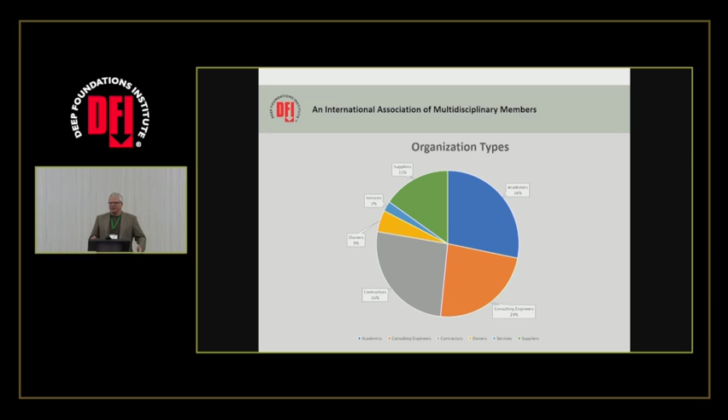I won't delve into this too much, but DFI is a very diverse group. It has all these people who are involved in the Deep Foundations profession. Here's a pie chart of the demographics - you can see a decent balance of contractors and engineers. There's a huge part, that blue part that says academics, but that really includes the students as well, and the academics are only about 4%. The students are really high because every student who's ever applied for a scholarship becomes a student member for free. Suppliers are an important part of it too - they help tell us about the material aspects of the different technologies.

DFI has 28 technical committees. There's one on seismic and lateral loads that Ben's probably pretty active in, and there was something else mentioned yesterday. We fund some research that was mentioned yesterday in Ben's talk as well. The 28 technical committees cover all the technologies, all the foundation type technologies that you see back there with the affiliates. There's lots of good publications from DFI. Every year there's an annual conference. Most of the committees have a manual about that technology that's kind of like best practices. There's a high quality magazine published 6 times a year. All this comes with your membership. You have to go to the conference to get the proceedings - they're available free later. The last thing is a DFI journal, peer-reviewed papers, published about twice a year.

And it's a whole lot easier and faster to get into that than the ASCE Geotech Journal. But there's more - when you become a member, you get access to OneMine, which has over 140,000 documents. Many of them are about mining, but it includes all the old DFI documents and some Department of Interior and Safety Organization documents as well.

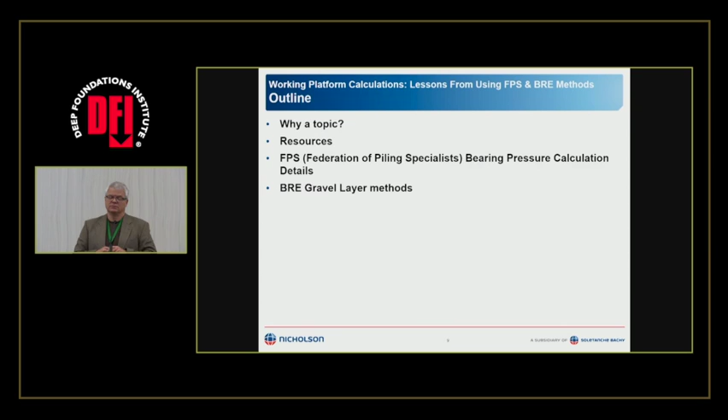Our first thing is a YouTube video produced by Keller, Soletanche, and Menard. This was produced back when they were fierce competitors in Europe. Now Menard and Soletanche are related, but it shows you how important they think this topic is, to cooperate and produce this video.

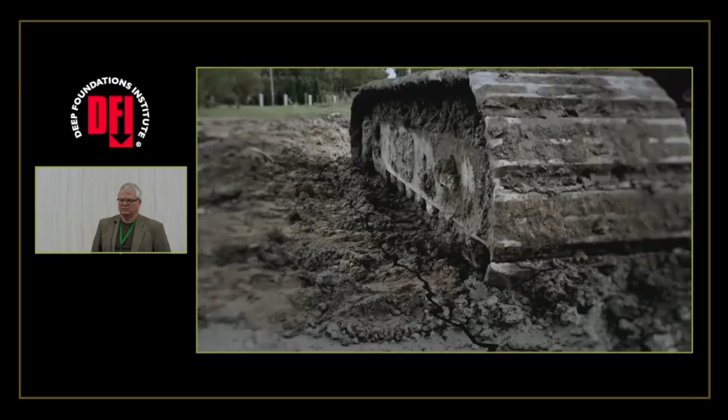Hope you caught that operator's face.

That was the big hit before, now it's like a flashback to a normal day on the site.

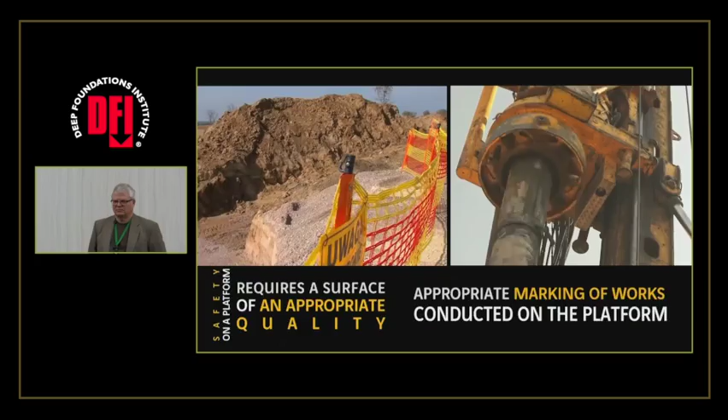So this is about where we want to head: high quality platforms, marked so that people don't drive off the edge.

Explosives are certainly a more European thing. Mark the perimeter so they know where they can drive.

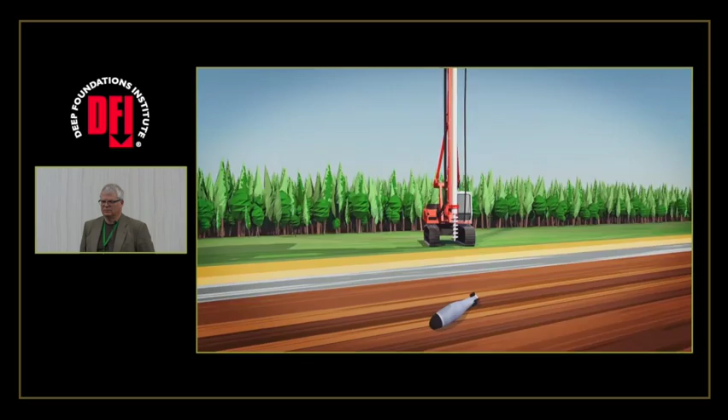Certainly walking on inclined surfaces is a big problem. We'll see some of the charts from the manufacturers that tell us what.

So the images at the beginning were all a reenactment, and it says that they didn't happen, but I think if they dug deep enough, there's probably some parts of that story that really are true. And just because that one was a reenactment...

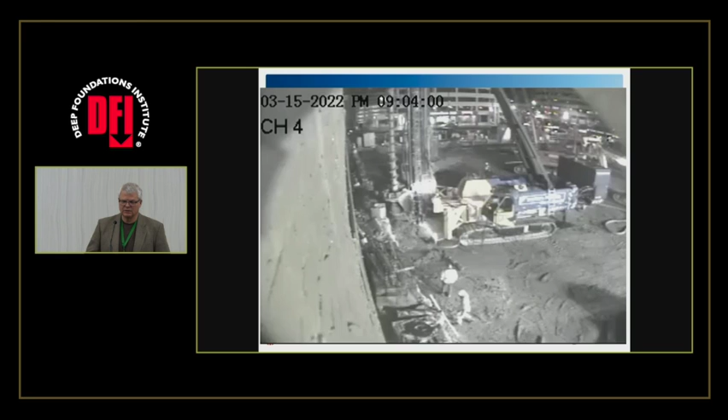Here's one that's real and recent. It's at night. It's always harder to control safety at night and see where what things are going on.

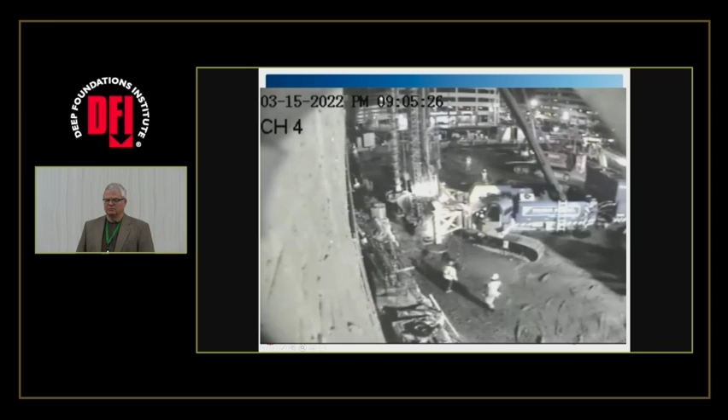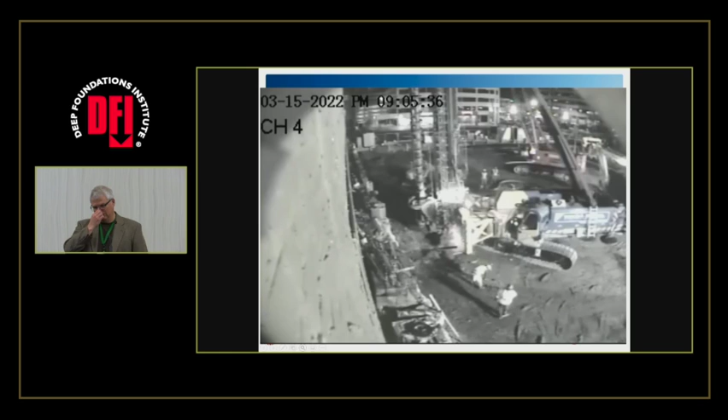Oh my, here we go. That's a bad day for everybody on the job.

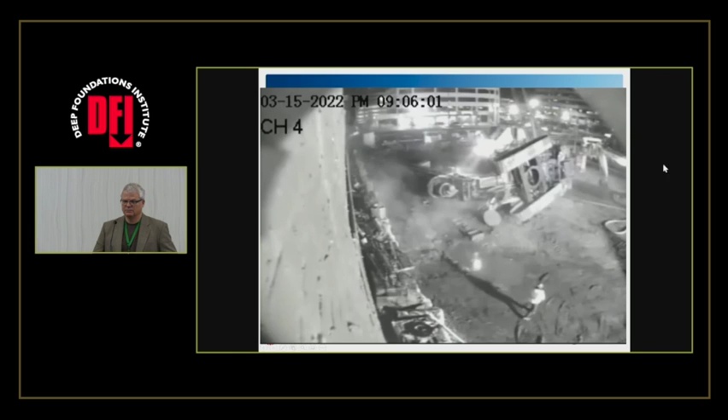Oh shoot, here's another one. Now this video is a little quirky because it's a video of a computer screen. That last rig was walking, this one's walking.

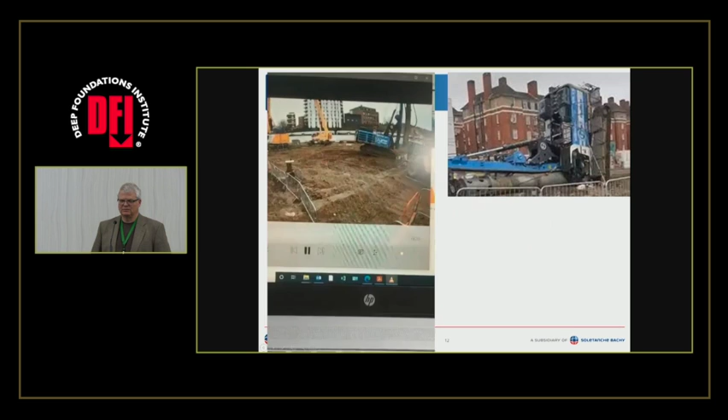When most of us saw the pictures on the right and other videos available on YouTube, we said we don't think this is a work platform thing. But when you see the image on the left, you can tell he was really sinking in.

So I hope those videos affect your stomach like they do mine.

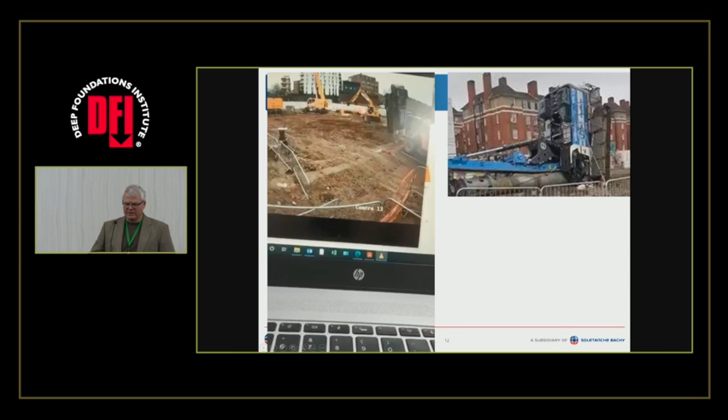So here's a bunch of still pictures, and this will be a little slower pace, so maybe you can see what activity is going on: drilling, extracting, walking, and also see where the rig operator is.

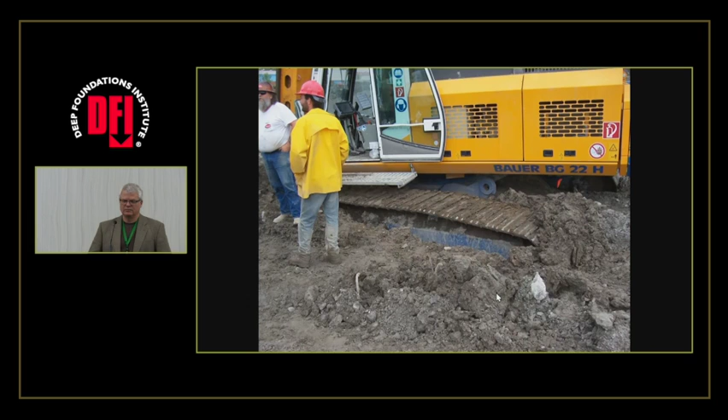That's the same one as the last one. On most of these rigs, the operator... so this actually went to the operator's side. The operator's on the left-hand side when you look from the back.

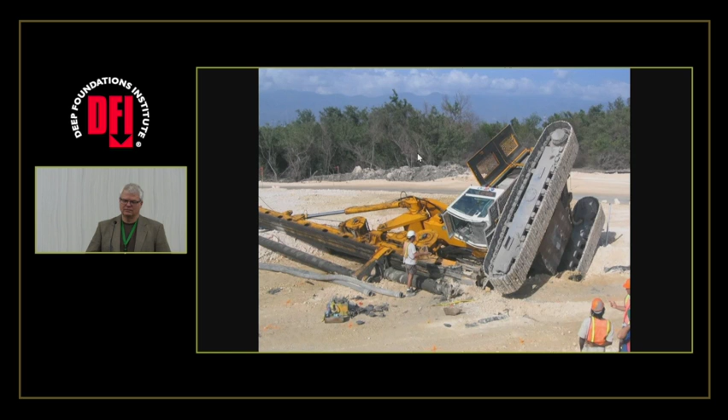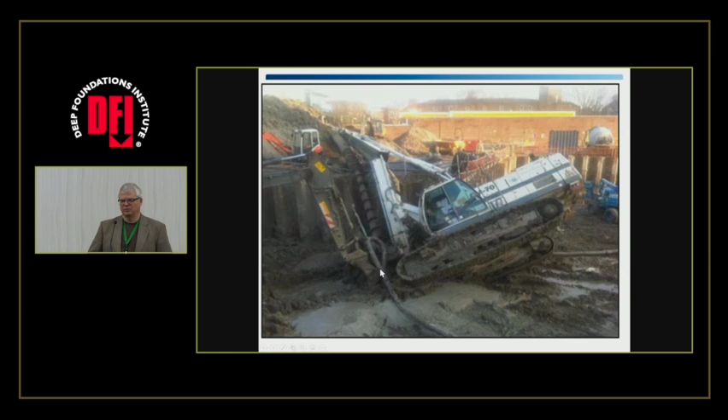Those two pictures were the same. This one, there's a chance that he was pulling tools, can't really tell for sure. Some tools are out and got bent on the temporary shoring.

Here's a whole collection. Another one on the front right track, going forward, front right track. In this case it's hard to tell what happened, and this was a crane system as well.

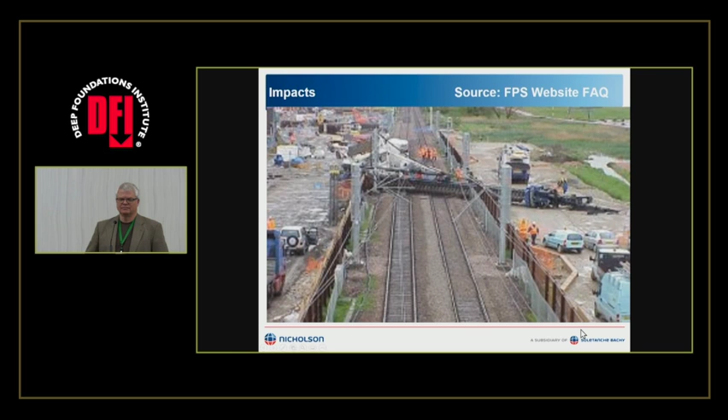You can see that there's impacts, blocking traffic. This is going to make a bad day for a lot of people on this project. In Toronto, a guy died. In this case, his operator cab was right there.

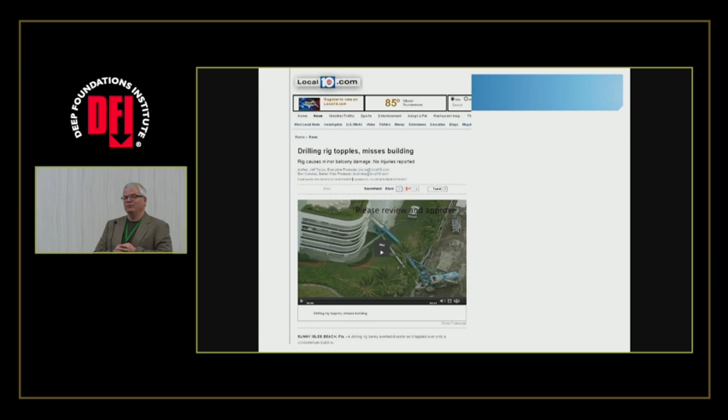This one actually happened when rain fell overnight and saturated the surface.

So I might have led you to some observations there. Think about your observations, and then here's what mine are: it's often over the corner of the tracks, and we'll see why that is when we look at the calculations.

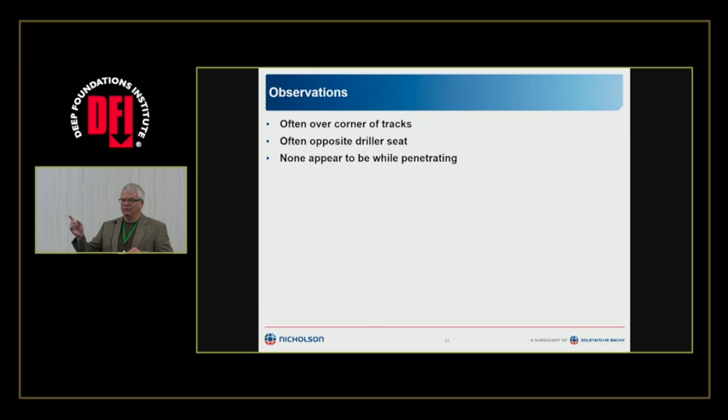It's often opposite where the driller's sitting. I noticed more this time that we're towards the driller, but very often it's opposite the driller. And not a single one of them appeared to be while drilling the hole. You'll see that becomes an important observation when we do the calculations.

So here's what we should have: geogrid, also a separation geotextile would be good, and some gravel to make a work platform. That is the calculations I'm going to talk about today. There are also guidance documents from Europe about how to do that with a cemented, prepared surface.

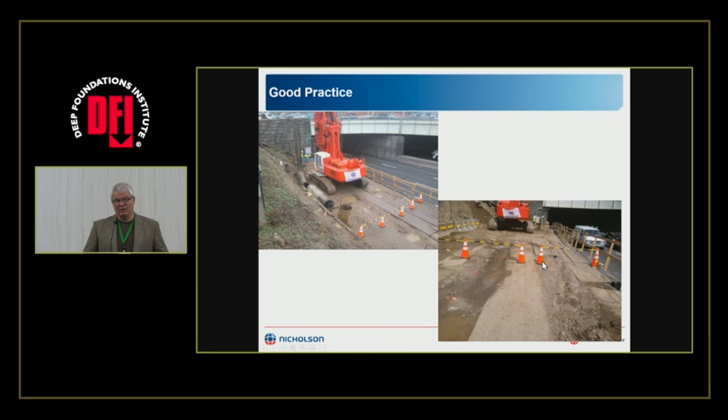It's hard to think about combining them because of strain compatibility. And you can use crane mats. Crane mats work wonders. This is not the most efficient way to use a crane mat, to walk along it, but it's often what's done.

So here's the resources available. This is from the DFI working group website, a working group of ADSC, DFI, and PDCA. ADSC is the Association of Drilled Shaft Contractors, but now likes to go by the International Association of Foundation Drilling. PDCA is Pile Driving Contractors Association. ASCE's been involved a little bit too.

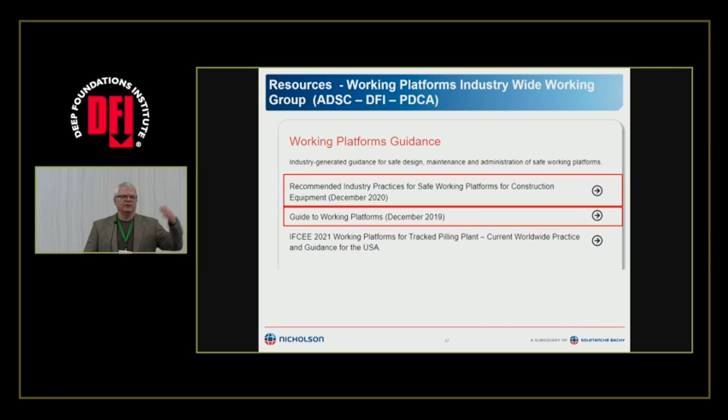Under the guidance documents, there's two that I will show covers of and talk about. This one is the US document that says here's what we should be doing, and gives some guidance on when you should actually do some calculations. And then this one is an ongoing effort with EFFC, the European Federation of Foundation Contractors, to continue this process and make things better.

So here's the cover sheet for the EFFC one. You can see it covers a lot of stuff. Working platform design is just one of them. It defines responsibilities, at least how the Europeans see it, and it has a lot of great references in it.

Another good document you can get at from the DFI website is this video. It's a webinar by the guy who was involved with developing the Federation of Piling Specialists spreadsheet, the one I'm going to talk about. It covers a lot of the nitty-gritty and nerdy stuff, and he does a really good job, so I'm not going to repeat some of what he does.

The Federation of Piling Specialists is a UK organization, and they got tired of this stuff, and they basically said we're going to demand this. All of our members are going to demand that we do calculations and prepare subgrades and certify them, and that's how their practice is. So they developed this spreadsheet to calculate the pressure under the tracks.

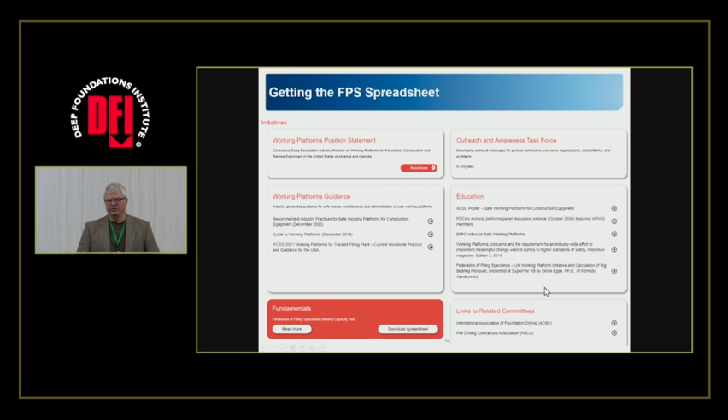So we're going to move into some nerdy stuff with this calculation. The first topic we need to talk about is equivalent rectangle bearing stress, and then we'll look at pulling some data from manuals and stuff you can get from the suppliers.

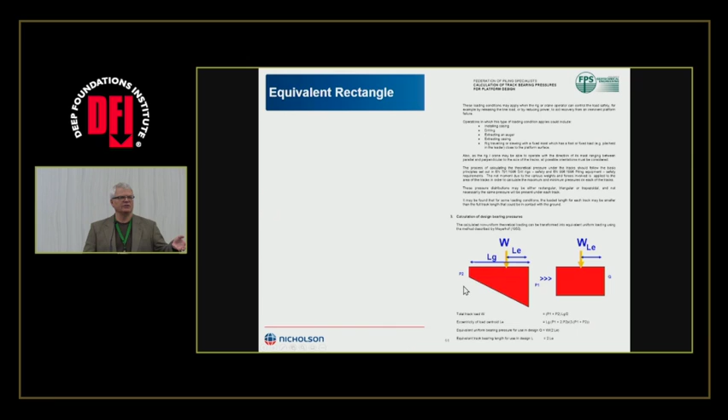I think it's pretty standard even in soil mechanics textbooks. And honestly, there's forces here—you got to look at different weights with different eccentricities. That's the same type of thing you got to look at with a crane or a drill rig.

So what happens is you have this length, you have an eccentricity to the total forces, and you have a length beyond it, and then you say this length on this side is the same as that length over there to get an equivalent rectangle. When you have a triangular distribution of any shape, across the whole length of the track or even a partial length of the track, this pressure is 75% of that pressure.

Okay, let's see what we can get. I just put this slide in yesterday after I was going to have multiple PDFs and things going, and after Mike's struggles, I thought I better put this all in the presentation.

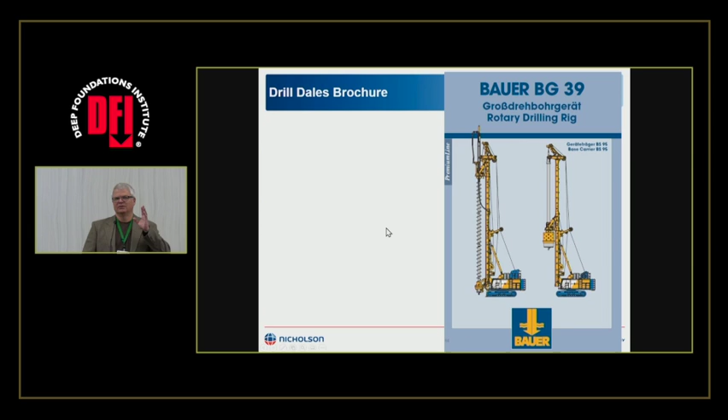I misspelled sales—this is a sales brochure for the Bauer BG39. I'm going to talk about a Bauer BG39. The other manufacturers give you similar information; we just own more Bauers than the others, so that's what I worked with.

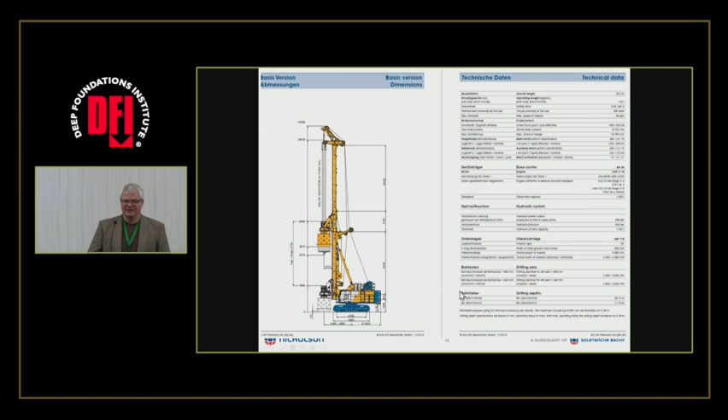So from the catalog, you can get a nice diagram of the rig. This is the basic version, and way up here we'll blow those up, and you can see it's a pretty darn tall rig. There's 10 meters there, 3 meters, 9 meters—it's getting up there in the air.

So we blow up the data, and we can see that it weighs 133 tons. Those are metric tons. Most of the rigs we're using are European made, so we got to work with SI units.

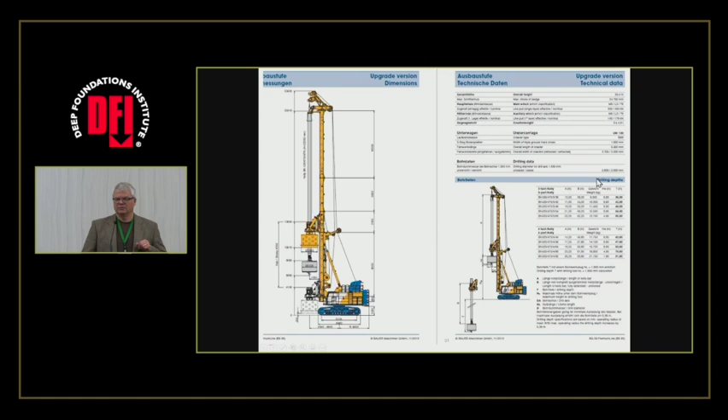It turns out that the rig I'm going to work with is called an upgraded version, which really means it has more counterweights and a wider track, a different track setup—they're wider and longer. So if you take that 133 tons from the base machine and add 6 counterweights at 4.9 metric tons, and divide it by 2 tracks at 1 meter each with a contact length of 5.31 meters, you get an answer that's 3 KSF. That doesn't sound so bad, 3 KSF.

That's maybe what we would have recommended for the footings on this job, and that was really governed by settlement. So how can this be a problem? How can these rigs be falling over from a working platform?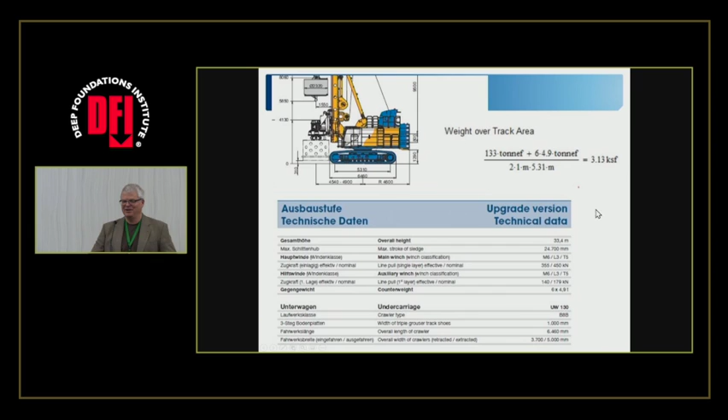By the way, this calculation here with the metric input and the US output was done in a program called MathCAD, which I find to be the most powerful programming language in the world. I am not a consultant to them.

So the reason there's other things going on is there are other forces. There are forces on the main line. On these rigs, the winch back here comes up over here, and that's the main line, connects usually to the Kelly bar of the rig. In this case, it connects - I'm not sure what it's connected to when you're doing CFA piles.

There's an auxiliary line, and I couldn't find a good image of that. That winch comes from here, goes up, over, and to the side. So you can use this to pick up a tool and get it underneath the rig, or do other ancillary picks. Then there's crowd.

And crowd on these rigs - and I'm pretty sure the Liebherrs are similar - is from this winch here, and it pushes and pulls on this drill rotary bracket that from Bauer is called a KDK. And of course we can have different tools out there, so there's going to be different forces involved with different amounts of tools we put on there.

The previous calc you did didn't have any tools in it. No, it did. It actually did have the weight of the tools in the base weight of the base machine, for at least the Kelly system.

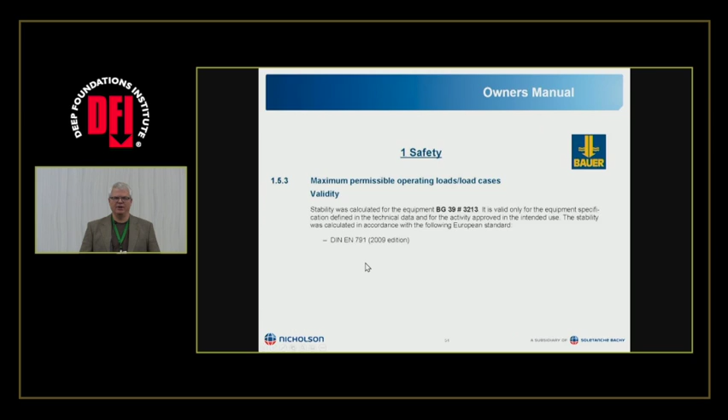An important thing to note in your owner's manual, when you start digging deeper, is that when Bauer calculates things, they calculate according to a European norm called 791. That's now replaced with a newer one. But in either case, they do the calculations like a triangle or a trapezoid. This is the new version - it shows exactly the same formulas.

So when you get a number from the catalog, at least from Bauer - I haven't dug into Liebherr's yet, but I'm pretty sure they'll do the same because this is what their norm tells them how to provide the information - you get the triangular diagram. But for doing geotechnical calcs, we want the rectangular one. Plus, we might use different tools and different counterweight setups on the rig in the future.

To really get the meat of the data, you got to go beyond the brochure to the owner's manual for that rig. In the owner's manual, it gave me that clause above, and then these diagrams here - this is for the main rope case. So load on that main rope that supports the Kelly. It says I can put 355 kilonewtons on there, and I'm going to get a pressure working in the vertical situation of 430 kPa.

That's 9 KSF. Whoa, that's a whole lot different than the 3 we had. And if I want to change the angle of the mast, like boom it down to make a bigger pick on that main line, I can get even 550 kilopascals, and that's 11.5 KSF. This deals with the rig being sideways over here - you get the same number.

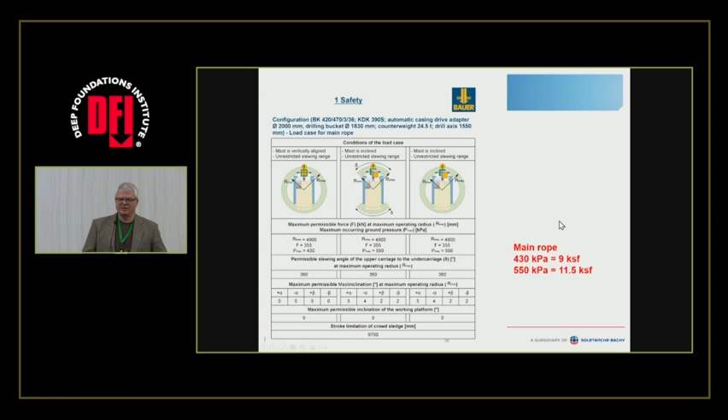And they have another case for the auxiliary rope and another case for the crowd rope. So now we're getting much bigger pressures, but they are the peak pressure, like at the toe of a retaining wall. And that's not what we want to use to design.

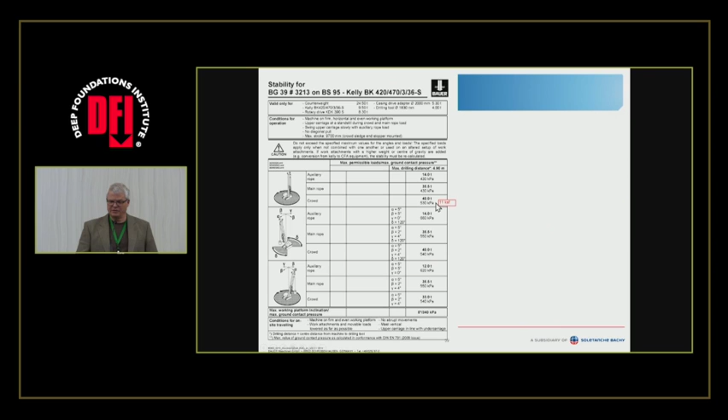If you're good friends with Bauer, you can get them to do a calculation for the particular case you're after. This ends up being a replication of what's in the final manual that we got, and it shows that same 11 KSF. It also showed that it was done using that EN 791, so we know for sure it's a triangular or trapezoid distribution.

If you're really good friends with Bauer - and this is from Malcolm's slide - then you can get them to do these diagrams. These are called butterfly diagrams, and for many years Liebherr actually has this diagram in the cab for the operator. But it's still calculating a peak corner pressure.

This shows that as I rotate the rig around, I get here to about 30 degrees off the tracks, and that's my max pressure. Boy, we saw a lot of rigs with that type of orientation, didn't we? So this is really good information to know.

The other thing that's amazing is you get around here to 90 degrees, and your pressure on the ground's way down. Now that's shocking to most drill operators. They realize the tracks are longer in that direction than they are wide, and they think it's more stable in that direction. And it is, if you're sitting on concrete. But if you're sitting on soil, it's better for the soil to operate that rig at 90 degrees.

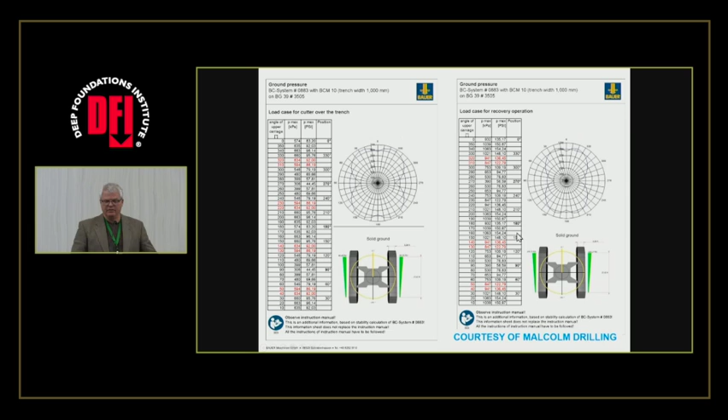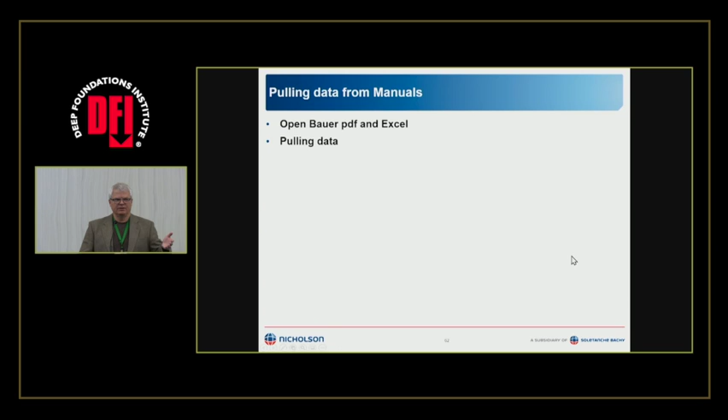You can learn it from these graphs from Bauer, and you can also learn that same lesson in the Federation of Piling Specialists spreadsheet. So we still got this dilemma: we got this peak number from Bauer, or Liebherr, or whoever, and we got to convert it to the equivalent rectangle. The challenge is we often don't have this minimum pressure that corresponds with that same maximum. We might want to do something different with the tools, and we don't have time for them to get back to us, so we'll run the Federation of Piling Specialists spreadsheet to come up with the answers.

So now I told you why you got to get involved with this, why someone needs to look at this Federation of Piling Specialists spreadsheet.

And from the owner's manual, you can get more detailed information further down in the pages I showed you already, with each component and its center of gravity. This actually looked a little better on my screen.

So here, for the Bauer manual, center of gravity: a positive X means it's towards the mast from the center pin, a negative X means it's away. So you can break down the different components, and then take all those weights and eccentricities and bring them over here and enter them into this spreadsheet.

And then if you want, you can change the drill tooling, because that might be the purpose of doing this. But for right now, I am completely trying to replicate the Bauer numbers that they gave me, so I'm going to keep the same drilling system here as there.

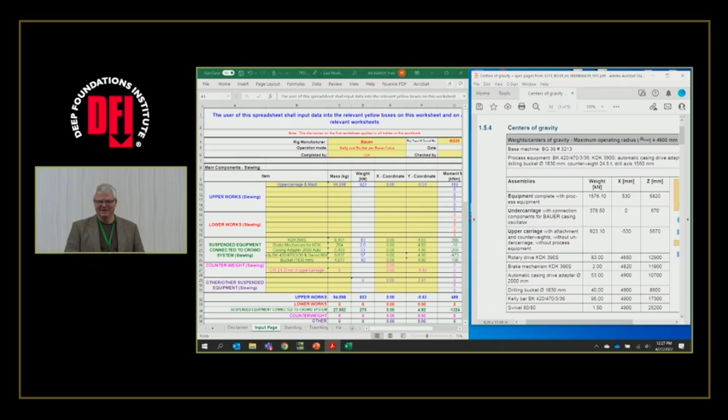In the process of doing this, you got to learn the drill manufacturer's terminology. So that rotary head for Bauer is called a KDK, not a natural thing that comes to your mind. And you got to learn that you have a casing adapter and there are brake mechanisms, and learn the words that they use.

But that's not all that happens. We're going to now apply forces to that drill rig through those winches. So it's important to get these forces that you can apply, and those were the same numbers that were in the Bauer tables I showed before, but I can also get them from the owner's manual.

Down here, I can get 355 kilonewtons on the main winch, 140 kilonewtons on the auxiliary. And then this is a little bit of a dilemma: it shows me in my owner's manual that I can only get 200 on the crowd winch, but they did the calculations above with 400 on the crowd winch. So I'll just keep the 400. I haven't talked to Bauer about why there's that discrepancy, and in the end I'll show you why it doesn't matter much to me.

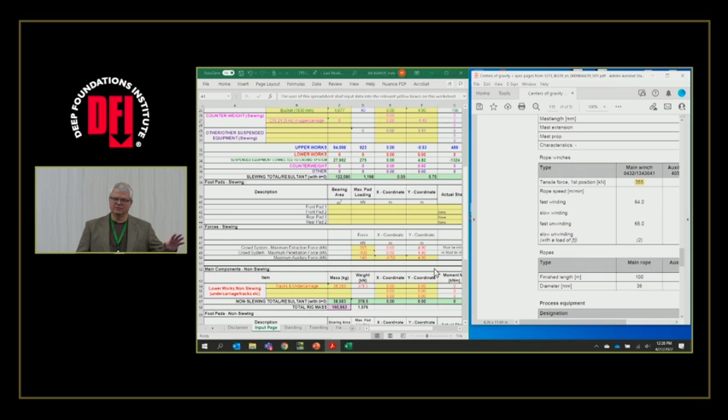And the tracks we input down here, the tracks are centered, they're symmetric, which is good, makes it simpler. It doesn't matter which way you're operating the rig. That's not true with all rigs.

Okay, so we got our stuff pulled over. Oh wait, the other information we need to put in is the track width and length. We could get that from either manual, either the brochure or the owner's manual, but the center distance between the tracks, from one track to the other, we had to get out of that PDF document I had open. That was not in the brochure. And of course, how wide that is affects all these calculations. You got to define the geometry of your footing.

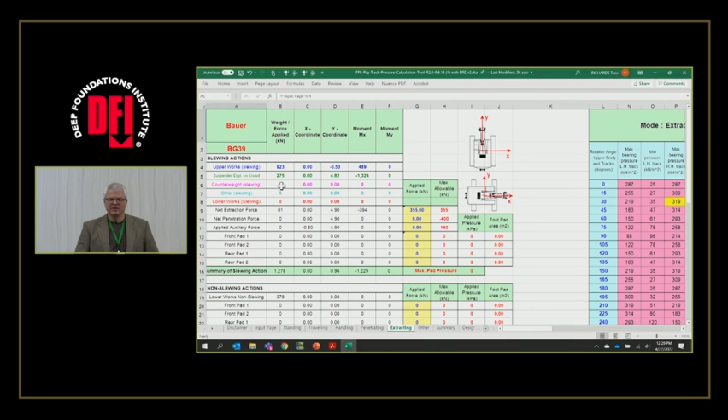So you input all that stuff, and then the calculations: there's a calculation for standing, there's a calculation for traveling, which I don't see as being different than standing. There's a calculation for handling, so that's the auxiliary line, penetrating, extracting, and so it's taking all those numbers over here and then running them through.

It gives you both the front and the back of each track, and then gives you the equivalent rectangle bearing stress, for all those cases. You can even define another case if you want. And then that puts it all in a summary that looks like this.

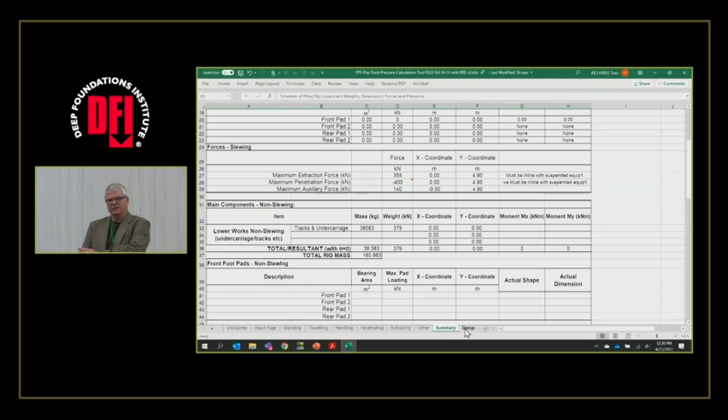Well, that summary was a little quirky for me. I wanted it a little condensed. So from here to the right is my spreadsheet, the additions I did. I did a different summary, and yeah, it's maybe not as pretty. But I also added in, where I could, a link over the peak pressure at the corner of a track compared to what the manufacturer said, and looked at the ratio between the two.

And for handling, we're within 14%. Little disappointing, but that's what I got. And for extracting, we're within 25%. Even more disappointing, but it's something.

The other thing that comes out of it is we see that the ratio, the FPS spreadsheet's coming up with lower numbers. From the FPS spreadsheet we can determine our peak pressure compared to the equivalent rectangle, and for the most part it's right around 75%, which is nice, but I'm not sure it always occurs. It occurred for this rig. I think the other rig I looked at was similar.

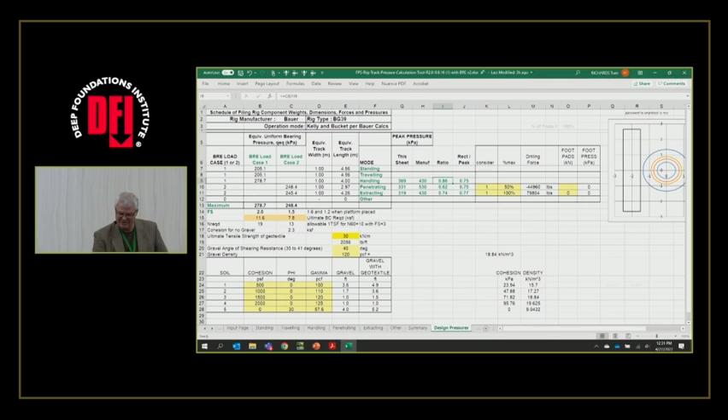So now we can go on and decide, well, now I've got to go back a step. The one inconsistency I have is I can't get this penetrating number to tie. Right now it's off by more percentage. And I set it up so I could play with what percentage of the crowd force I wanted to use, and change the number here.

Shoot, this is where I wish I had a calculator. If I put 100 in there right now, it won't solve it. So something's different between the calculations, especially for penetrating. The spreadsheet says it can't even have that much force, and the Bauer numbers don't match either. I bring this up in case any of you are working with this and end up with the same inconsistencies.

Now those pictures come into play, because I told you we didn't find a single rig that went backwards from penetrating. It would take a pretty extreme event for the driller. I think you'd have to have a driller have a heart attack, and penetrating's pushing forward on the joystick. I haven't run a rig, I work in union environments. But I would think he'd have to have a heart attack and fall forward and keep pushing forward, basically jacking himself off the drill tooling.

We didn't see any pictures that happened like that. So for the most part, I'd say never let the penetrating case govern. Put in whatever number — what matters is walking and extracting.

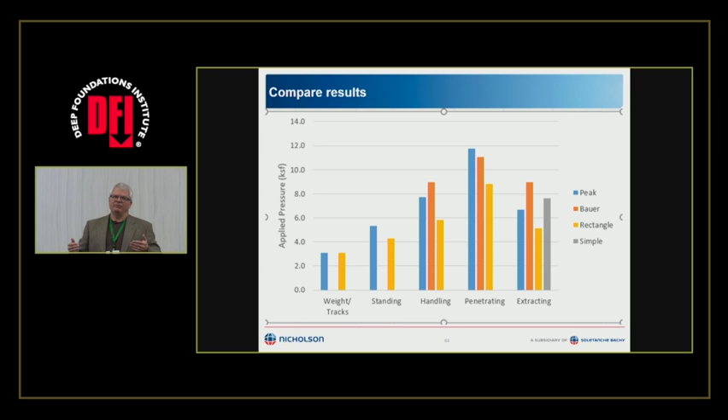When you use the term 'stand,' is that the same type of work as moving? Because all of a sudden it shows the rig was moving. I'm not sure they were all moving — most of them, the videos certainly were. Right now, I don't see a difference in the calculations whether it's standing or traveling. The Federation of Piling Specialists spreadsheet, I don't see it handling anything different. And really, there's a kinematic effect — you've got this weight that you're stopping when you're tracking, or starting when you're tracking — that's not in here right now, from what I can tell. I always get the same answer, standing versus traveling. I suppose you could put some other weight in while you're traveling, I don't know.

Okay, here's a simple method. If I don't have anything on a rig — the stuff I'm showing you was manuals from 2013. Rigs older than 2013, maybe 2010, the stuff in the manual is real obscure. And we have a bunch of micropile rigs that we bought when I started working there, and there's very little in there except the total weight of the rig.

So if you have nothing, you know the weight of the rig, and you know how much force you can pull with. This pulling force is like an external force on the rig, right? So it's an extraction force.

You don't really need to know the centers of gravity if you assume that it's perfectly balanced. You're about to tip the thing over with that max extraction force, which is conservative. There are, with cranes, the rule is it can only be 75% of the load that'll let it tip over. I'm not sure what the rules are for drills.

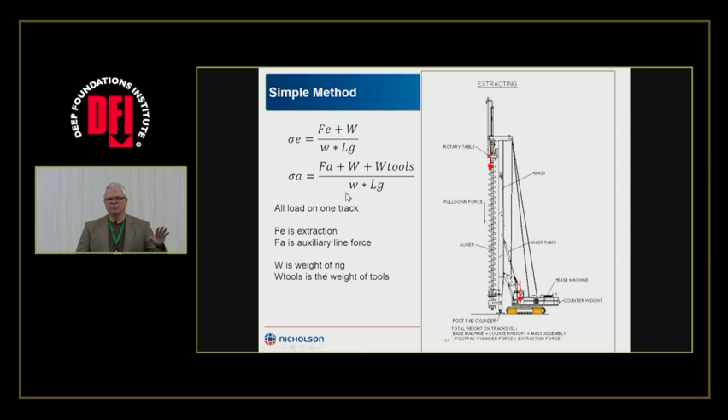But so now you can say all this force just goes on one track. If you got nothing else, that's a way of coming up with a number. And you can also check what happens if I'm holding my tools and use the other line, which is this auxiliary line, then your formula is this. So in an absolute worst case, that's the upper bound.

So if we graph all this stuff versus slewing angle, I didn't describe slewing angle. My tracks are sitting this way. Slewing angle is I'm rotating the house of the rig around this way.

You can see that the penetrating one is still set up as, it's close to governing. It's got a lower factor of safety, and it's kind of wacky. An extracting one, I'm sorry, handling is higher than extracting.

When you're extracting in the Federation of Piling Specialists spreadsheet, the weight of the tools, which are pretty significant, are on that main line. It's part of the extraction force, so you've already accounted for the tools. You don't want to double count them.

So you can see, kind of like that butterfly diagram for that one particular Malcolm rig, that if you're at 90 degrees, you minimize the stress you're putting on the ground. But it's even better than that. No, that's not true. You're minimizing the stress you're putting on the ground.

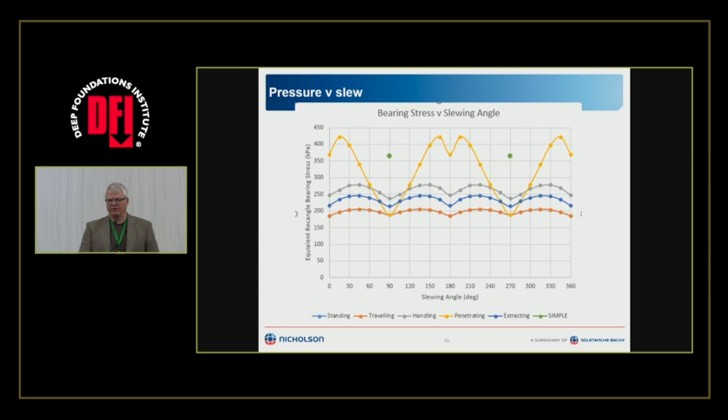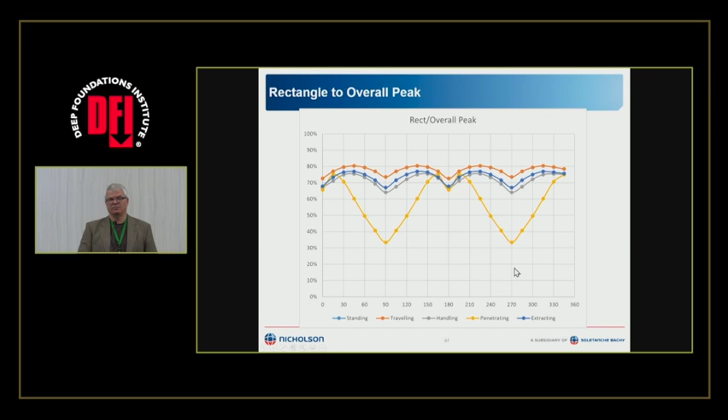Okay, so what did we learn from this spreadsheet? There's lots of details to track. That crowd case can really blow up, but I don't think somehow something's not getting handled right between us and Bauer, between the Federation of Piling Specialists and Bauer.

The equipment manufacturers are giving you the peak pressure, and as long as it's triangular, it's 75% of the peak, and it kind of turns out that most of the time when they're in the max operating condition, it's pretty close to triangular over the full track length.

Okay, now we get into working on the geotech side. We might all get involved with doing those detailed calculations and tracking of things and understanding the forces that are applied. You really need to understand how the forces get applied for something to be worthwhile.

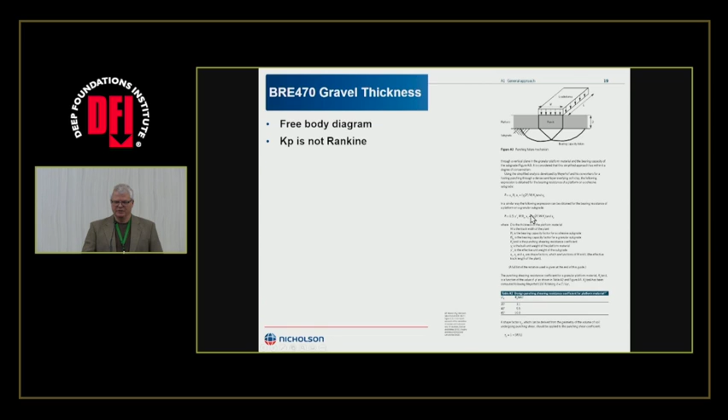So there's a different document. BRE is the Building Research Establishment in the UK, and they've used this model for putting a granular platform over a subgrade. And so here's a blow up of it, and the idea is you have a bearing capacity down here, and this gravel is going to reduce that by friction on the sides and also on the ends.

One of the things that, one of the first versions of this spreadsheet we ever did - sorry, my phone's ringing in my ear, spam. One of the first versions of this spreadsheet we ever did, we said KP. Okay, let's use Rankine KP.

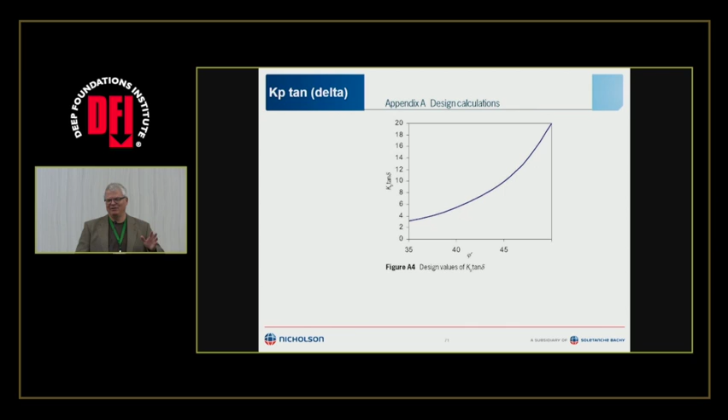And we were just getting these ridiculous gravel thicknesses. So this particular diagram is not your typical KP. In fact, the formula that's used for KP in a Soletanche spreadsheet is apparently called a Brinch-Hansen KP that I can't even find. But the idea is to match, you want to basically replicate their model.

So if I come back here to my spreadsheet, if that's their design method, let's make sure that we're coming up to the same calculation. So these orange squares are what happens with a Soletanche Bachy formulation for KP tan delta. At one point I was trying to do a quadratic fit, and in the end I said, you know what, I'm just going to go with their equation.

So it's close. Sometimes you get up here to some pretty high friction angles. This is gravel, so we can get some pretty high friction angles out of it. Then there's a little bit of divergence. At 50 degrees, it's more divergent than their line.

So the other lesson is it's important to keep going with the model. Once this is the system they're using, keep going with their system to calculate things.

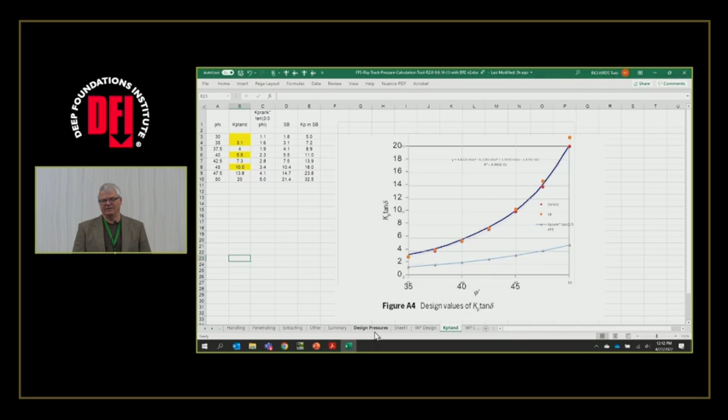Let's just cover that while we're here. So that's the basic model. The bearing stress underneath is either c Nc or 1/2 gamma n sub, I can't remember which one that is. It's not n sub q, it's n sub gamma. Those are all following the Meyerhof formulas.

Maybe I should go back to the PowerPoint a second. What I have noticed recently is that their methodology doesn't take the benefit of this surcharge pressure, the thickness of the gravel, on this bearing capacity down here. There's a little bit of conservatism there. KP tan delta may feel pretty high, but there's conservatism in the number they're using underneath here. Just something that's in there, but it's the system.

So I set this up, so I've got 5 different cases I can run, and I can put in the numbers here and just look at the answer in gravel thickness right here and compare things. And it turns out that if you use 2,000 PSF for cohesion, you come down to the minimum 1 foot recommendation that's in the Federation of Piling Specialists and BRE methods.

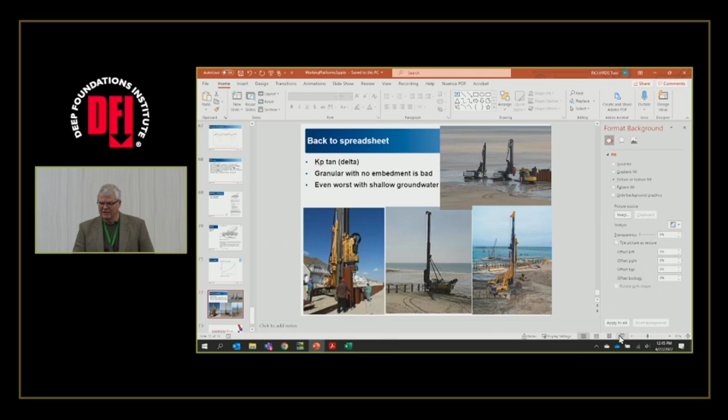And that gets us to these slides. I don't have the details of these rigs, but I can tell you that one's sitting on this one. Where's my arrow? This one's sitting on sand. He's working off the corner of the tracks, so it should be pretty high under the toe here. That one I think would be hard to calculate.

Here's another one. And now he's getting right down near the water. And here, these ones are submerged, and they're still working without some other system underneath. And maybe they're not BG39s, and maybe they're not applying 11 KSF, but I'm telling you that a rig sitting on that type of ground is going to be hard to calculate.

So what makes this work? Well, we all know we can drive cars on Daytona Beach. And that is something that's missing. So that surface tension that lets us drive cars on Daytona Beach, and it exists in this sand here, and probably this sand here, is what makes things work.

So there are other phenomena that are helping our rig be stable that aren't in the methodology. And we need to appreciate that's out there rather than just using a 30 degree subgrade for the calculations.

So I had a whole lot of rig geometry stuff and not a whole lot on this bearing capacity stuff. Certainly part of those formulations is the length of the equivalent rectangle, so it looks at the various correction factors for the length to width ratios. But the bearing capacity is kind of a simple formulation, and it's using Meyerhof.

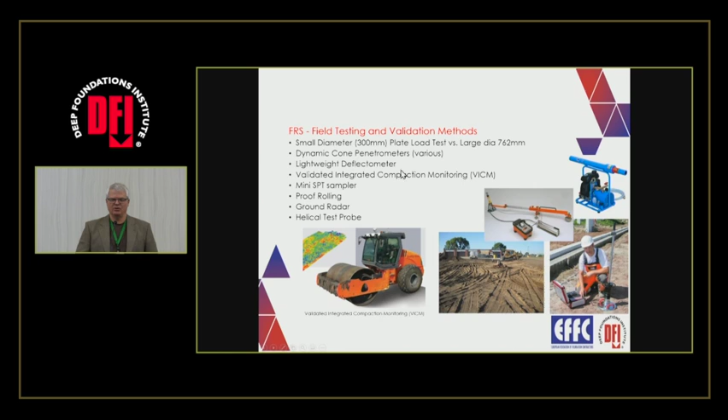That's all I have. I'll tell you one more story that ties into who should be responsible. I didn't have any pictures in my presentation because I didn't dig hard enough to find it, it's not in my regular directories. We had a rig, a modest size, a BG-18, doing a secant pile job, and I actually did calculations for that job. There was an alluvial clay that wasn't saturated at the surface, and from blow counts and some pocket penetrometer numbers, I thought this is okay, we'll just put one foot of gravel. One of the few jobs we actually did the calculations for. That's a whole nother story.

On that particular job, one of the few rigs we've had get in such a precarious situation, the rig went over. We had actually done the calculations, and the rig still went over. But he went over in a hole that the GC had dug while doing site preparation work to disconnect a utility or something. So we can't just put it all on the drilling contractor, because the GC controls what really goes on the site, stuff that we can't really investigate. Even if we come out there and proof roll, we might not find it. Everybody's got to be involved and educated and concerned about this, because if a rig goes over, it's a bad day for everybody.

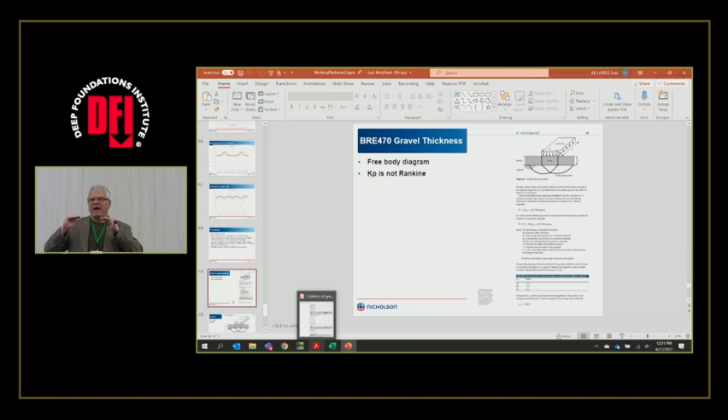So do you have an input parameter that you can put in different types of geogrid? Yes, so you input the geogrid, and it takes the strength of that geogrid. I don't really know, other than it's in their formulations — I have not studied how mathematically that tension in the geogrid gets converted into punching shear resistance. But it's in their formulas that go along with this diagram, this diagram here.

And it's in the spreadsheet. So this is a plug number of 30 kilonewtons per meter, 2,000 pounds per foot, as a tension strength of the geotextile. What is the geotextile, is that geogrid or is that something else? Well, I'm just running numbers, I haven't actually used one in production, we just did gravel in production. Would the gravel thickness be less than with the geotextile? Exactly, I mean, how long is that? Oh boy, seems counterintuitive — it is less.

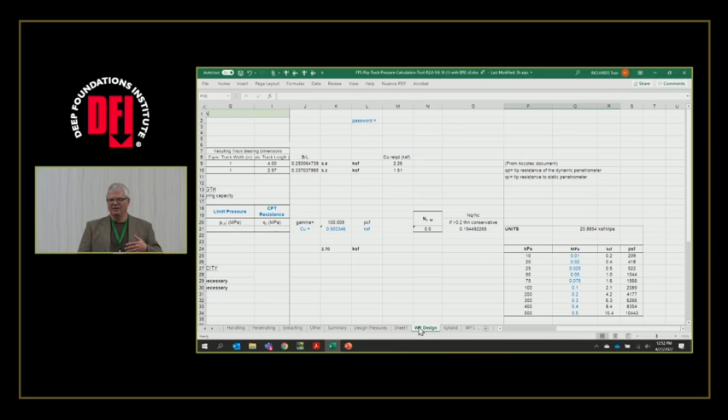Shoot, I made some corrections to this spreadsheet in the last week, and now I've got some other corrections. There is no doubt the answer is less with the geogrid. These pages here were developed by some combination of Soletanche and one of our engineers, and then we found this KP tan delta issue. Soletanche has a whole nother spreadsheet now, and I thought that I had all these things calibrated to the new spreadsheet and corrected all the things, and now I can't explain why the geogrid hurts. It doesn't, so it must be pulling over the wrong numbers, because here, I'm just converting a number wrong. There it shows it, so it's just this, right there, it's a conversion.

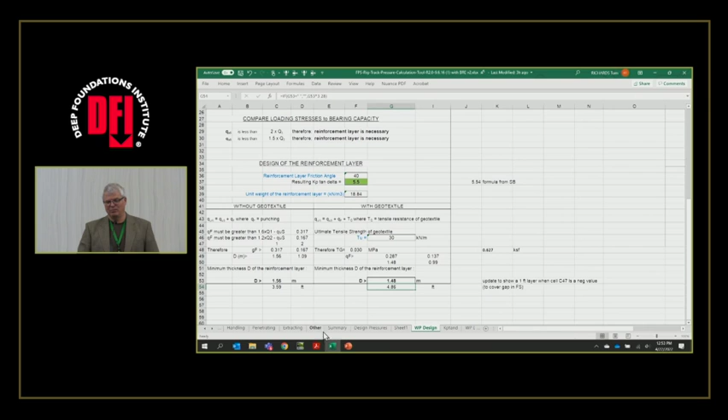I'm very interested in the spreadsheet once you fix it. Well, so I will, thank you for pointing out the error. I really thought I had this tied in and back-checked with the Soletanche spreadsheet that I can also share. The reason it's still using this one is this one can actually let you put a C-phi material in — the Soletanche spreadsheet, because the manual is set up for either cohesion or friction, that's how the Soletanche spreadsheet was set up. If you want to do a C-phi material, maybe make some estimate of the surface tension in the water, you could put that in as a cohesion. So yeah, thank you for pointing it out, and I'll get it fixed. Well, I have a little less embarrassing question.

So for those of us who work in environments with good ground all the time and rarely have to do this, tell us about practice where you're working in bad conditions, like where these rigs overturn. What is the typical good practice? Is 1 or 2 feet of gravel over a grid or fabric now the norm? What's the normal good practice you see in the field?

The Federation of Piling Specialists recommends 1 foot minimum, or designing with a higher factor of safety. With this particular rig, you need ground with nearly a 40 degree friction angle just to deal with these bearing stresses. You're looking at ultimate bearing stresses of 11 KSF.

Those are big numbers. I did this row as a simple check: what type of blow count do you need? There's an old rule of thumb I learned in my first job, a ton for 10 - 1 TSF per N value of 10. It comes from the Peck, Hanson, and Thornburn graph. So simply, if I have blow counts of 19, do I stand a chance?

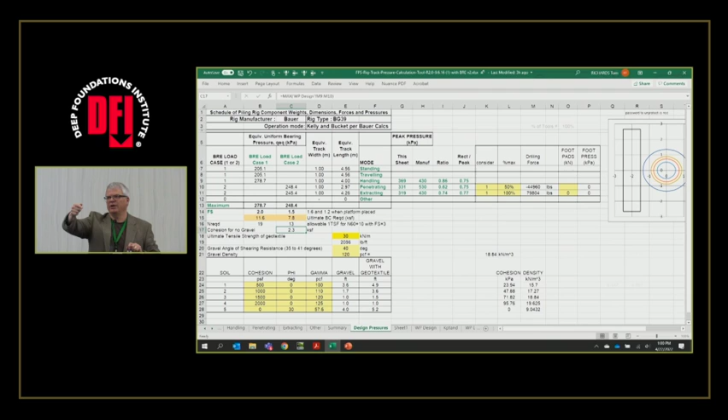Yeah, one more question. So you mentioned you have a simplified method to compute the pressures - is that different than the FPS? You had it in one of your spreadsheets. Yeah, because it's conservative. It says that when I turn my rig 90 degrees and put the full extraction force, I'm about to tip over the rig - all the weight of the rig and the extraction force are going on one track. The only reason to do it is when you don't have enough information or enough time to go through detailed calculations. But really my purpose in showing it is for if you've got a rig that doesn't have a detailed manual, let's say 2005 or older, you've got to do something. At least it's a way of doing it.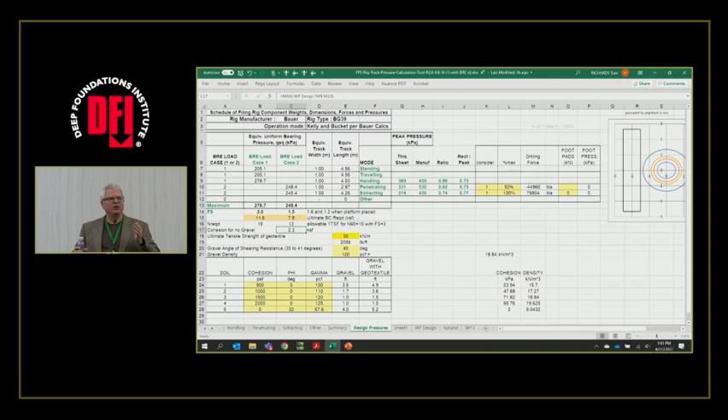All right, I'll make my way back up to the front. I got one other comment: I think if anybody uses any of the images or videos you can find as negative marketing against another contractor, you're basically asking for you to be the next one to lose a rig. That is bad karma. So I don't want to hear about any negative marketing.

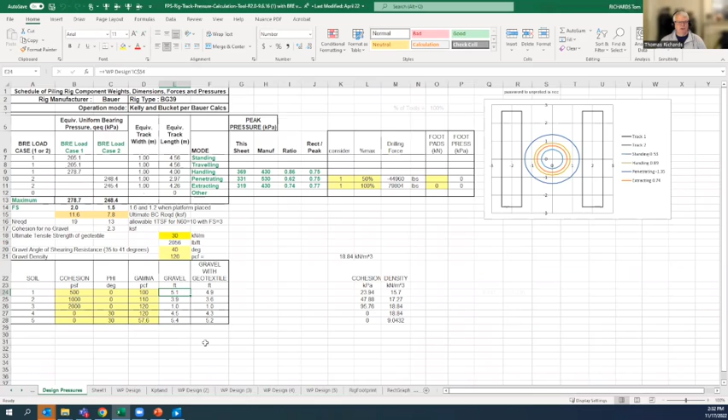The second topic deals with the Bauer manual and comparisons I made to it. What I learned from the Bauer representative is that the crowd force presented in the Bauer manual is pulling with the crowd winch, not pushing. For the pushing case, he says the force is electronically reduced and has a lower value than the pull force. This shows up in new manuals, which give a very different number for pulling with the crowd winch versus pushing with it.

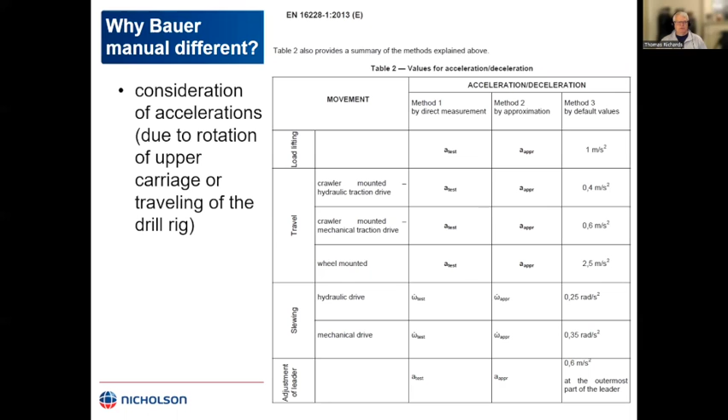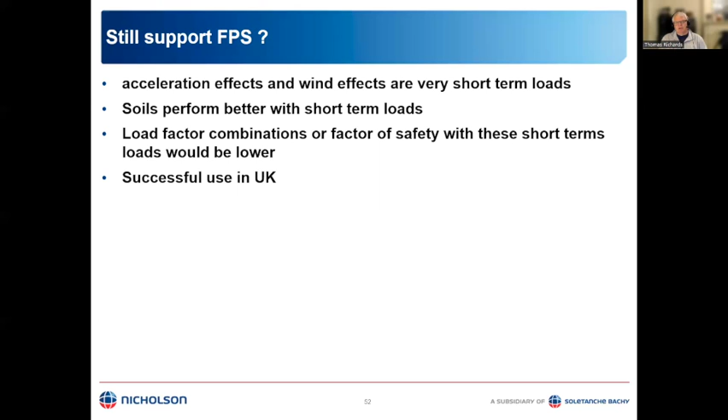So does that mean there are problems with the Federation of Piling Specialist spreadsheet? I suggest not, because the wind and acceleration effects are short-term loads, and most soils perform better under short-term loads that aren't cyclic. If this was done in load combinations with different factors of safety for the frequency of an event, these short-term loads would have a lower factor and would likely not govern. The final point is that the Federation of Piling Specialists spreadsheet has been used successfully in the UK, along with the BRE method of calculating gravel thickness. Thank you and have a great day.